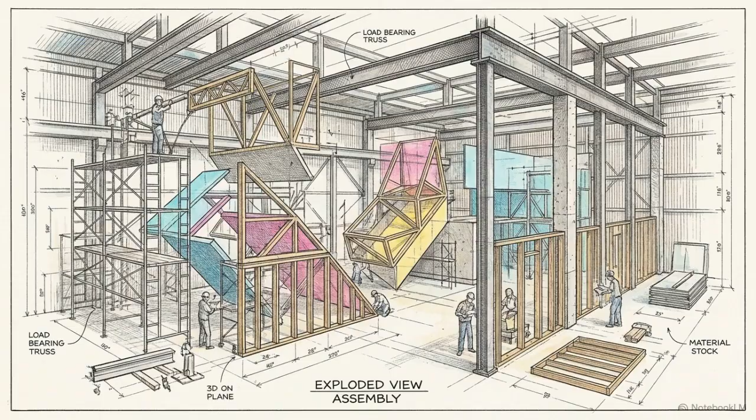Before software could generate virtual environments, mid-20th century artists began engineering physical ones. They sought to break visual media out of the flat, bounded rectangle of the frame. This effort formalized into installation art. Instead of a discrete, isolated object placed on a pedestal, the artwork became a site-specific, three-dimensional sensory experience.

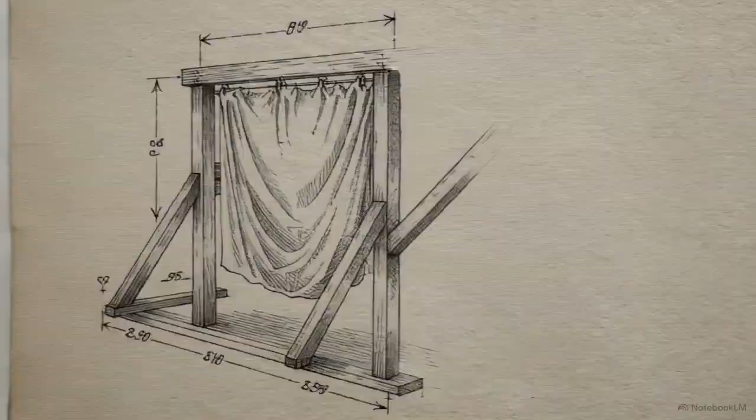In 1958, Allan Kaprow defined this approach as an environment. He constructed immersive indoor spaces, referring to them as project art, where the physical room itself was the medium. Kaprow argued that by bypassing isolated objects and taking nature itself as a model, artists devised art from the sensory stuff of ordinary life. This shift from making things to engineering entire sensory fields provided the conceptual transition necessary to move from physical rooms to digital simulations.

While artists were expanding into physical rooms, the industrial reproduction of their work was being broken down into microscopic layers. In the pre-press stage of commercial printing, original images are mathematically translated into separated forms for lithography. The four-color process relies on three primary colors: cyan, magenta, and yellow, plus black. As these semi-transparent inks overlap, they absorb specific wavelengths of light. When all three intersect, they yield near black. To increase sharpness, a separate black ink is mechanically applied last.

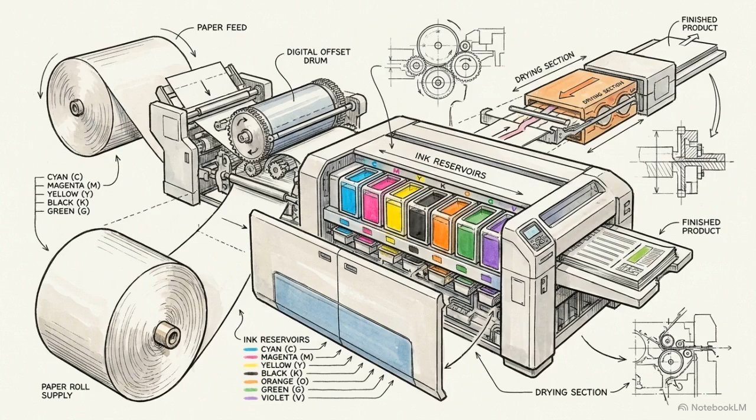The standard CMYK process has a restricted gamut, meaning there are vibrant hues it physically cannot mix. To solve this, industrial presses employ extended gamut printing, introducing distinct orange, green, and violet inks. Adding these three specific wavelengths expands the printable color range dramatically. With a 7-color system, modern printers can accurately reproduce 90% of all classified Pantone colors.

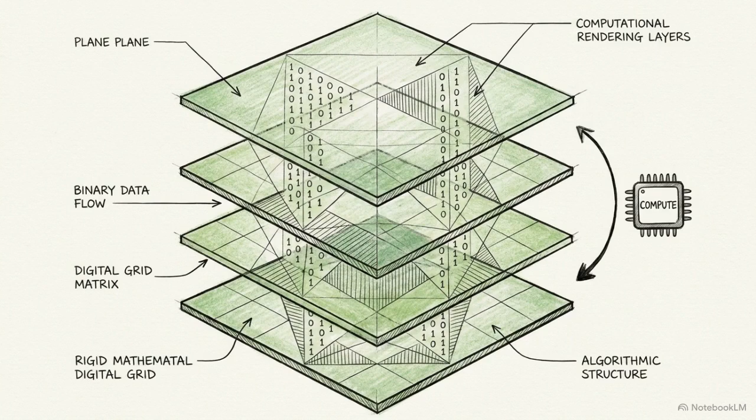By deconstructing a continuous image into distinct, overlapping data layers of subtractive ink, mechanical printing isolated the components of visual media. This separation of data was the exact logic required for computational rendering.

That logic fully matured with the introduction of computational processing, specifically computer-aided design, or CAD. A 1972 international conference in the Netherlands formally defined CAD as a problem-solving grouping, a strict integration of engineers, technical operators, and computing power applied to visual documentation. This collaboration yielded two strictly divided architectures for storing digital graphics, the raster model and the vector model.

The raster model relies on bitmaps. It stores visual information as an array of millions of distinct colored pixels. Because every single pixel requires its own mathematical coordinate, increasing the resolution demands an exponential increase in disk space.

In contrast, vector graphics do not use pixels. They construct images using sequential commands and mathematical curves placed within a coordinate system. Because the software calculates geometry rather than storing millions of static dots, vectors scale infinitely without any loss of sharpness. Digital platforms decouple the artwork from physical matter. The creator is no longer manipulating pigment. They are an architect arranging pure mathematics.

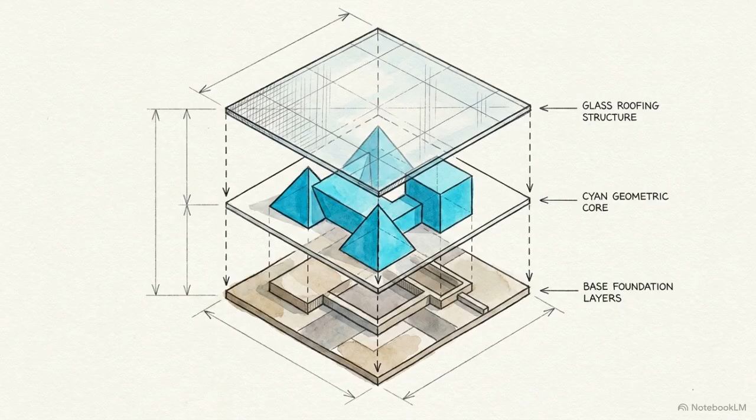These underlying raster and vector architectures power modern consumer illustration software. Digital brushes rely on algorithmic filters to calculate fluid dynamics, simulating the exact behavior of oil paints or wet watercolors. The software executes technical features that are physically impossible on canvas. Artists generate flawless geometric symmetry, mathematically perfect ellipses, and isolated layers of absolute transparency.

The most significant mechanical advantage is the nonlinear history state. An artist can trigger an undo command, erasing up to 20 previous brushstrokes from the array without leaving a single trace on the digital canvas.

Applying traditional paint requires a high-stakes, spontaneous commitment to physical material. A mistake requires chemical removal or heavy overpainting. Software strips away the physical consequences of creation. It provides an environment where endless, hyper-controlled iteration is possible, allowing for aesthetics that require extreme mechanical precision.

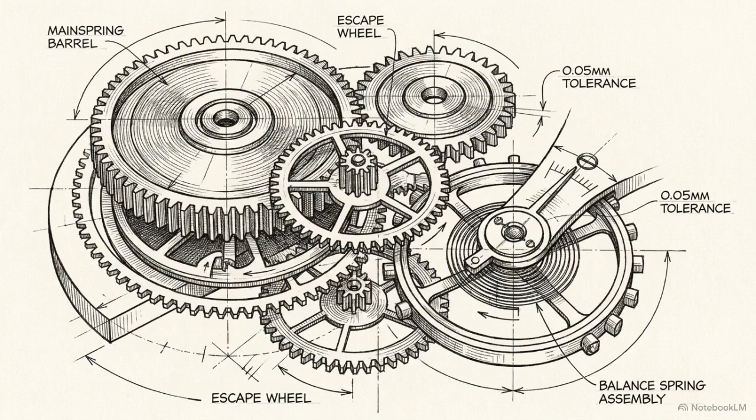In the early 2000s, the integration of digital precision with physical canvas took a specific form, a genre known as hyperrealism. While early photorealism aimed for an objective copy of a photograph, hyperrealism takes a more complex approach. It seeks to render the subject as a definitive, living object with a high level of tangible detail.

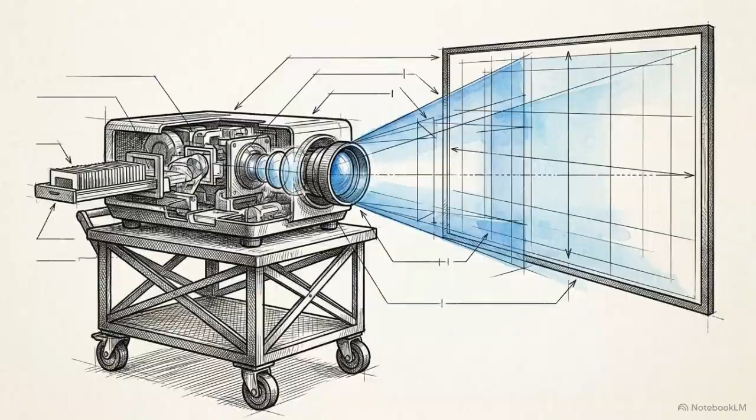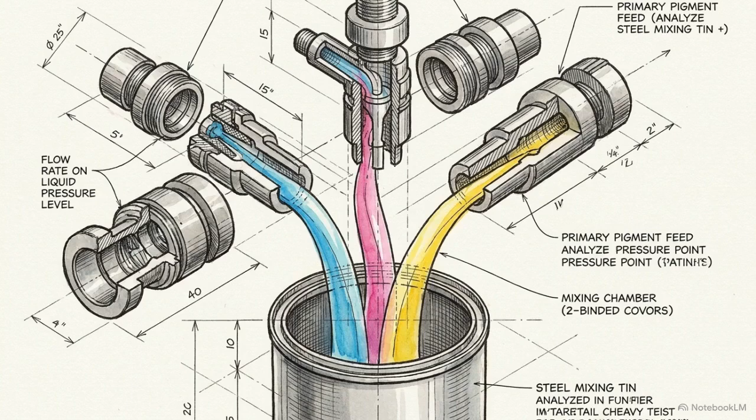To engineer these works, painters and sculptors rely heavily on mechanical transfer systems. They map out high-resolution digital references using multimedia slide projections, gridding, and precise mold casting. Their objective is to meticulously reconstruct the optical physics captured by the lens, surface textures, lighting effects, and exact shadow definitions. They scan the material world with a camera, process that image data digitally, and then use industrial techniques to translate those pixels back into physical pigment. It is a closed loop of mechanical reproduction.

This mechanical loop carries a specific philosophical intent, drawing heavily on the theories of French sociologist Jean Baudrillard. Baudrillard argued against the idea of a simple copy. He focused on the simulation of something that never really existed, a construct designed to pass as reality.

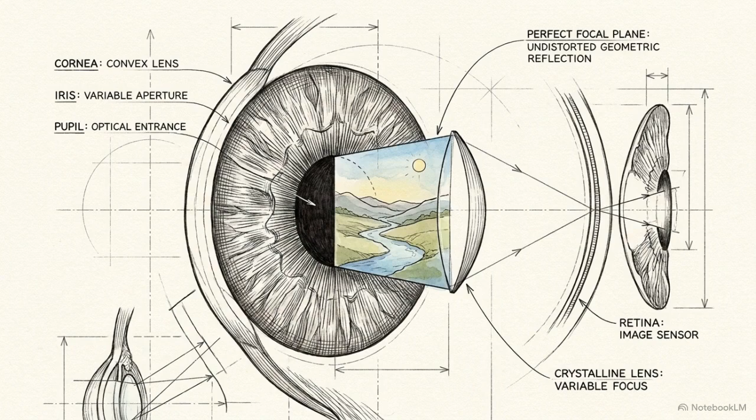Hyperrealists achieve this illusion by deliberately painting the anomalies produced by digital cameras. They map out strict depth of field limitations, photographic perspective distortions, and the pixel artifacting known as fractalization. The naked human eye does not process reality with focal blur or digital artifacting. By manually painting these optical errors onto a canvas, the artist engineers a highly meticulous false reality.

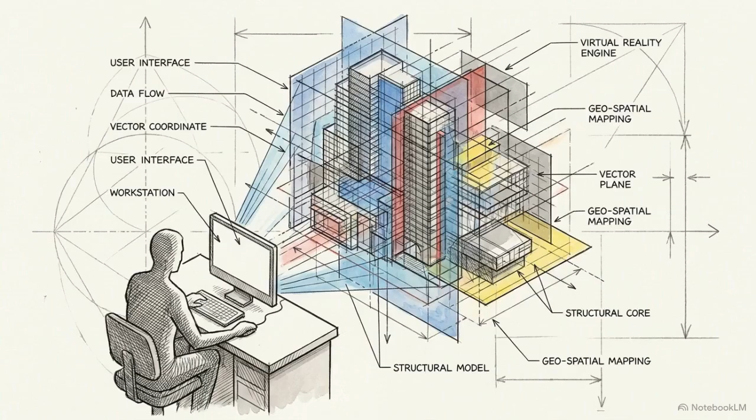From the rigid data layers of CMYK printing to the geometric precision of vector math, visual technology dictates the boundaries of modern media. It has equipped creators with the architectural tools to engineer realities.